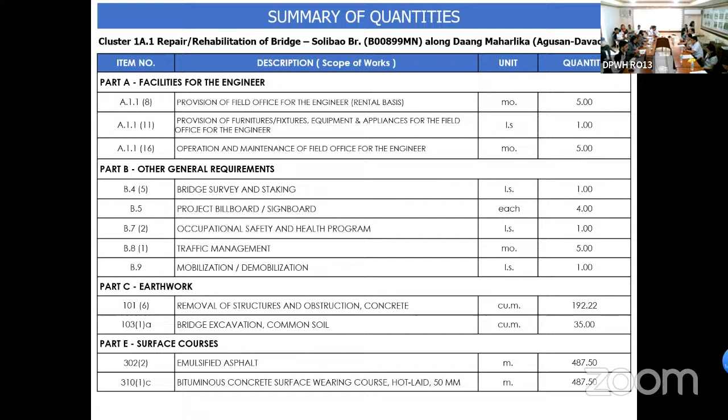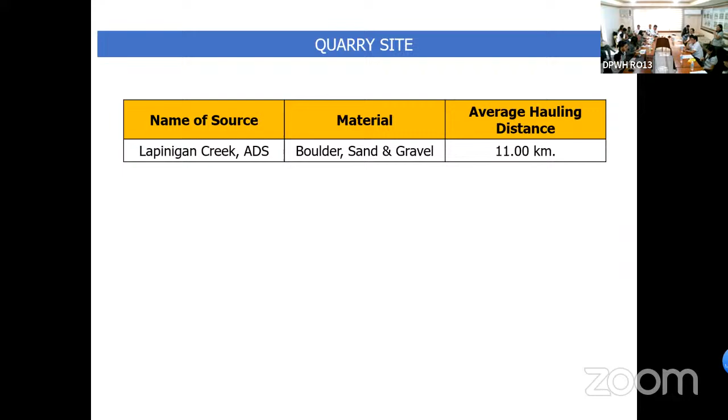Description of work to be done: facilities for the engineers, 0.66%; other general requirements, 2.55%; earthwork, 2.01%; surface courses, 1.42%; bridge construction, 93.36%, with a total of 100%. Scope of work: installation of restrainer, expansion joint, replacement of metal railing, application of asphalt. Summary of quantities for Part A, Part B, Part C, and Part E, and also for Part F, bridge construction. Quarry site: Lapinigan Creek, Agusan del Sur. Material: boulder, sand, and gravel. Average hauling distance, 11 kilometers.

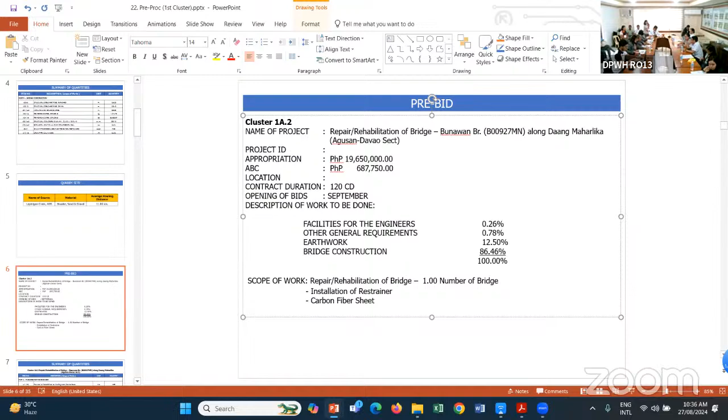Opening of bids. Total, sir -- it's per project. Oh, it's divided per bridge.

Description of work to be done: facilities for the engineers, 0.26%; other general requirements, 0.78%; earthwork, 12.50%; bridge construction, 86.46%, with a total of 100%. Scope of work: installation of restrainer and carbon fiber sheet. Summary of quantities for Bunawan Bridge, Part A, Part B, and Part F.

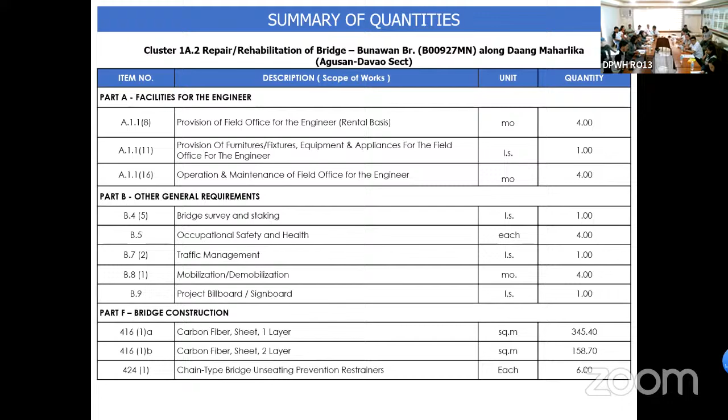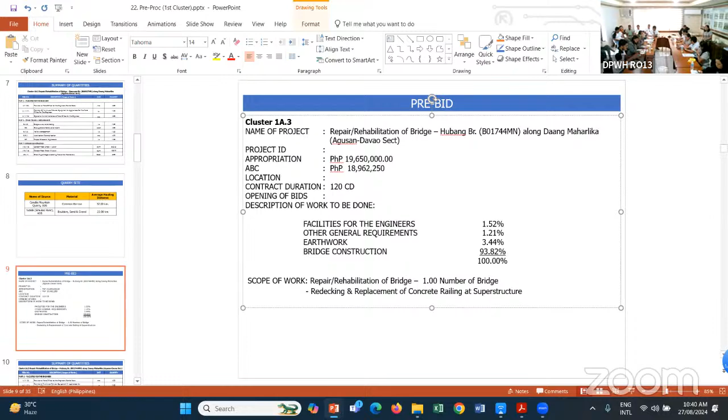For cluster 1A3, repair rehabilitation of bridge, Hubang Bridge, B01744 MN, along Daang Maharlika, Agusan, Davao section. Appropriation of 19,650,000 pesos. ABC, 18,962,000 pesos and 250 pesos. Contract duration, 120 calendar days.

Description of work to be done: facilities for the engineers, 1.52%. Other general requirements, 1.21%. Earthwork, 3.44%. Bridge construction, 93.82%, with a total of 100%.

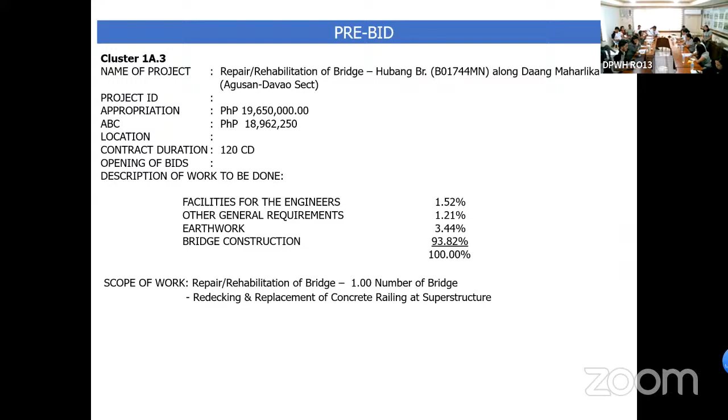Scope of work: redecking and replacement of concrete railing at superstructure. Summary of quantities for Part A, Part B, Part C, and Part F. Name of sources: Bangunay River, Agusan del Sur; Lapinigan Creek, Agusan del Sur. Materials: common borrow, boulder, sand, and gravel, with average hauling distance of 53 kilometers and 14 kilometers.

For cluster 1A4, repair rehabilitation of Bridge Bayugan Parallel Bridge 3, B01942 MN, along Daang Maharlika, Agusan, Davao section, with an appropriation of 19,050,000 pesos. ABC, 18,383,250 pesos. Contract duration of 150 calendar days.

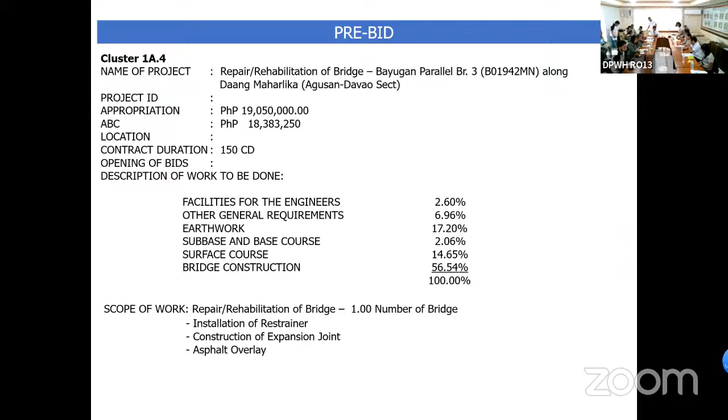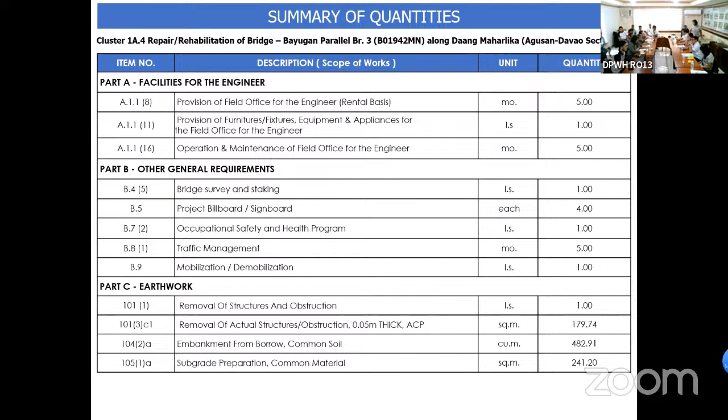Scope of work: installation of restrainer, construction of expansion joint, and asphalt overlay. For the summary of quantities: Part A, Part B, Part C, Part E, and Part F. For the quarry site sources: Candies Mountain Quarry, Agusan del Sur; Lapinigan Creek, Agusan del Sur. Materials: common borrow and aggregate sub-base course, boulder, sand, and gravel, with an average hauling distance of 53 kilometers and 20 kilometers.

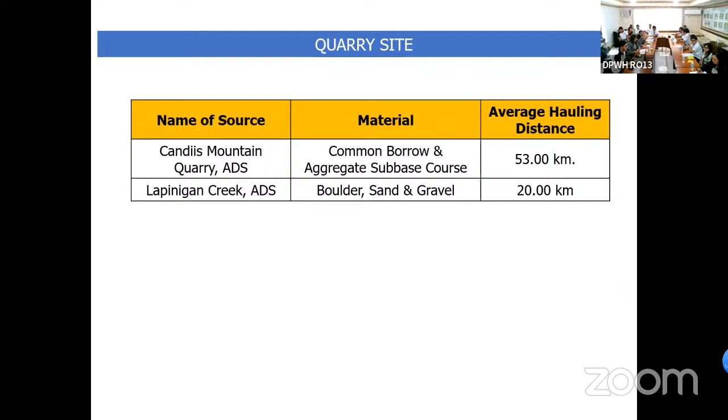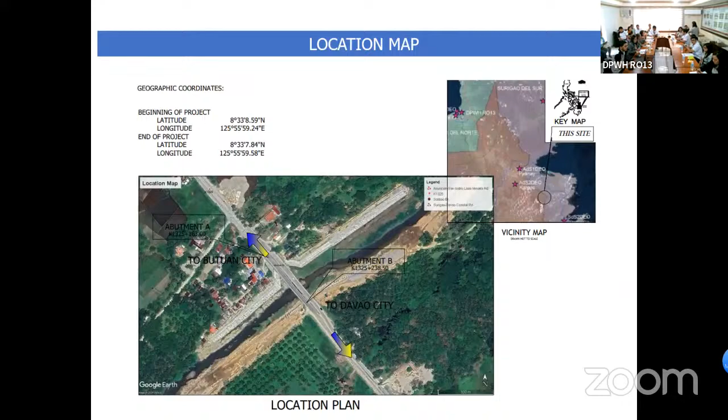For Sulibao Bridge: plans, location map, the general elevation. For the Bunawan Bridge: the location map, general plan and elevation. Carbon fiber plan.

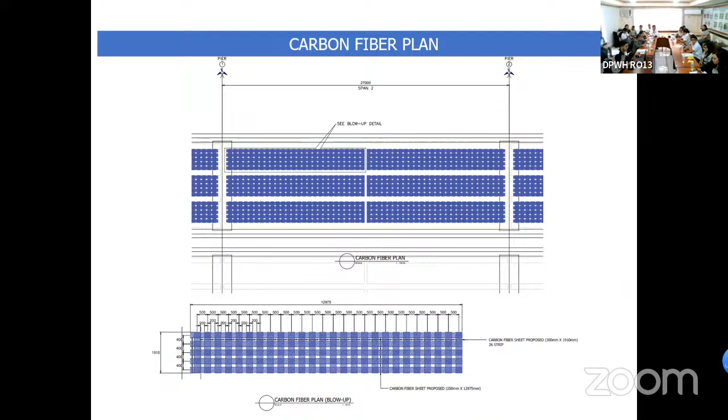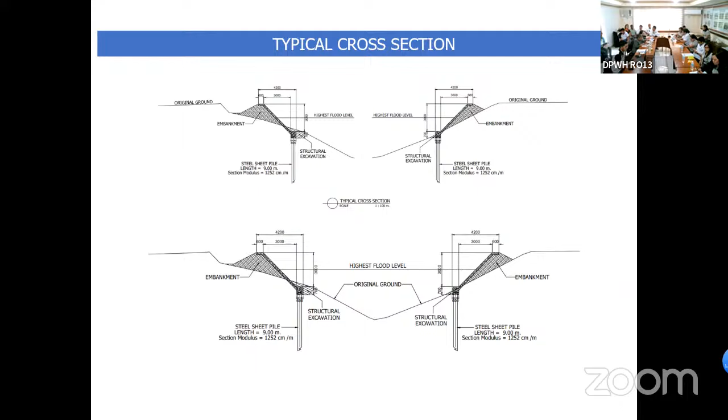For cluster 1A3, Ubang Bridge: location map, general plan and elevation, typical cross sections, concrete slope protection detail.

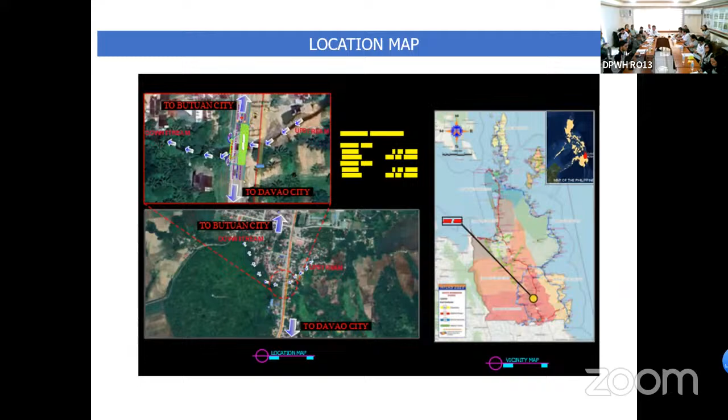For cluster 1A4, Bayugan Parallel Bridge 3: location map, general plan and elevation, typical sections. And that's all, ma'am, sir.

Yes, sir. So do we have any questions or clarifications? So I think there's none. So you may now proceed with the next project, sir.

Next, I will be presenting the cluster 1B with a contract ID of 23N000207, rehabilitation of disaster-related infrastructure and other facilities, repair rehabilitation of bridge, Mabuhay Bridge, and Banahaw Bridge.

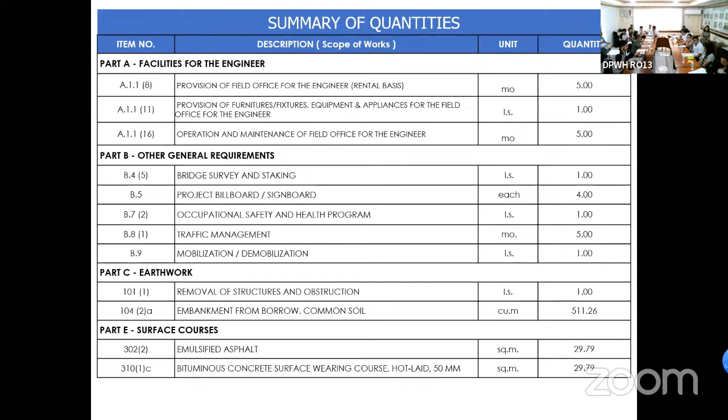Scope of work: construction of expansion joint, carbon fiber sheet at girder, reconstruction of abutment protection. Summary of quantities for Part A, Part B, Part C, Part E, and for Part F.

Quarry site, Anaoaon, Surigao del Norte, item 200, 300, and 505. Average hauling distance, 26 kilometers from project site. Bangunay River, item 104. Average hauling distance, 53 kilometers from project site.

For cluster 1B2, repair, rehabilitation of bridge, Banahaw Bridge, B01516 MN along Surigao City, San Juan Coastal Road, Surigao City, Surigao del Norte. Appropriation, 28,800,000 pesos. ABC, 27,792,000 pesos. Location, Surigao City, Surigao del Norte. Contract duration, 150 calendar days.

Description of work to be done: facilities for the engineer, 1%. Other general requirements, 1.41%. Earthworks, 54.45%. Bridge construction, 43.17%, with a total of 100%.

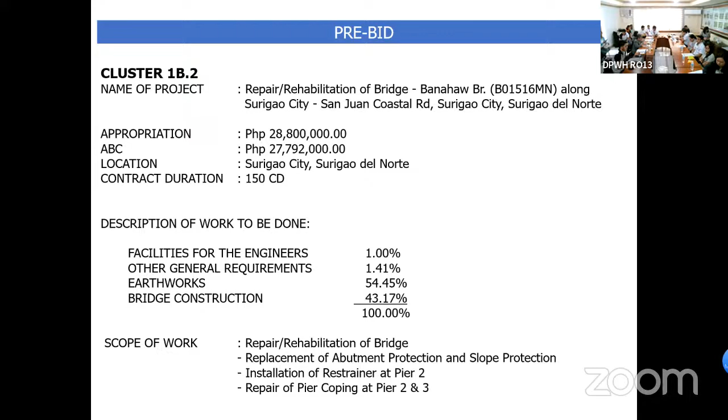Scope of work: replacement of abutment protection and slope protection, installation of restrainer at Pier 2, repair of pier coping at Pier 2 and 3. Summary of quantities for Part A, Part B, Part C, and Part F.

For the quarry site: Anaoaon, Surigao del Norte, items 200, 300, 505, and 311. Average hauling distance, 8 kilometers from project site. Bangunay River, item 104. Average hauling distance, 73 kilometers from project site.

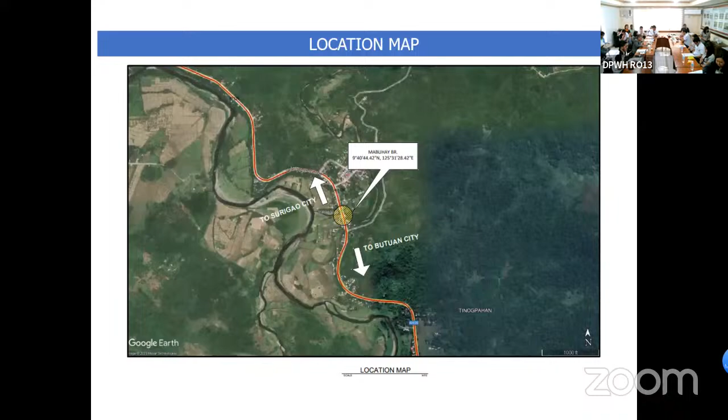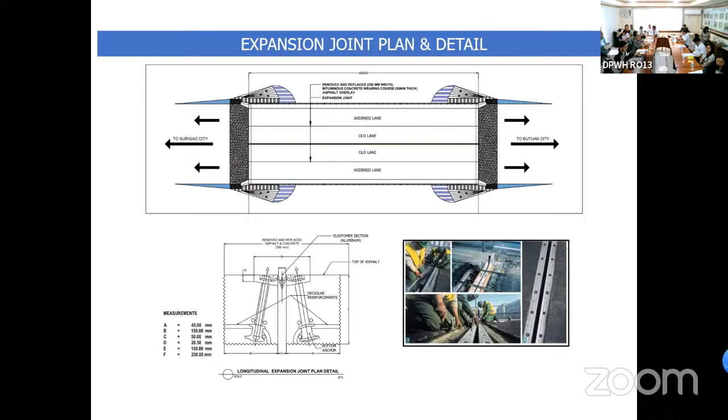For the plan for cluster 1B1, Mabuhay Bridge: location map, general plan and elevation, general plan at substructure, elevation plan at substructure, expansion joint detail, abutment protection detail.

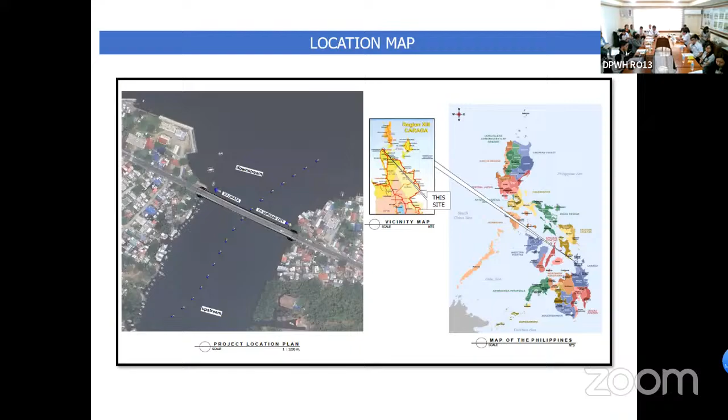For cluster 1B2, Banahaw Bridge: location map, general plan and elevation, restrainer detail, typical sections. And that's all, ma'am, sir.

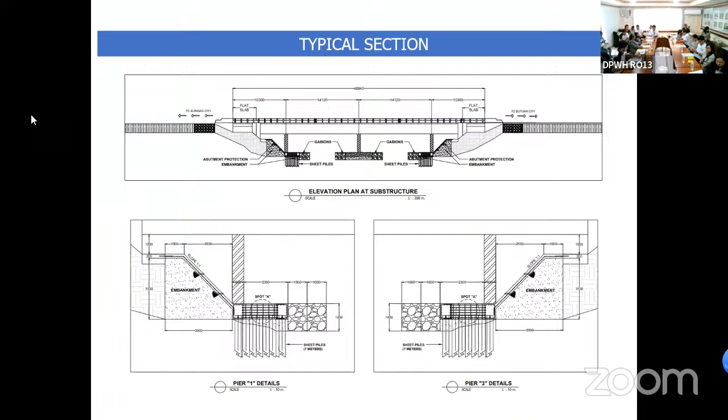Thank you, sir. So, do we have any questions or clarifications from the presented PowerPoint? So, none. You may now proceed to the next project.

For the next project, 23N00208, rehabilitation of disaster-related infrastructure and other facilities. Repair rehabilitation of bridge, Lipata Bridge, along Daang Maharlika, Lipata, Surigao section, Surigao del Norte.

With an appropriation of 19,200,000 pesos. ABC, 18,528,000 pesos. Location at Lipata, Surigao del Norte. Contract duration of 150 calendar days. Description of work to be done.

Facilities for the engineers, 1.41%. Other general requirements, 1.81%. Earthworks, 11.48%. Bridge construction, 85.30%, with a total of 100%.

Scope of work: repair and rehabilitation of damaged slope protection, installation of carbon fiber sheet at deck slab, repainting of structural steel I-girders, removal and replacement of lined canal.

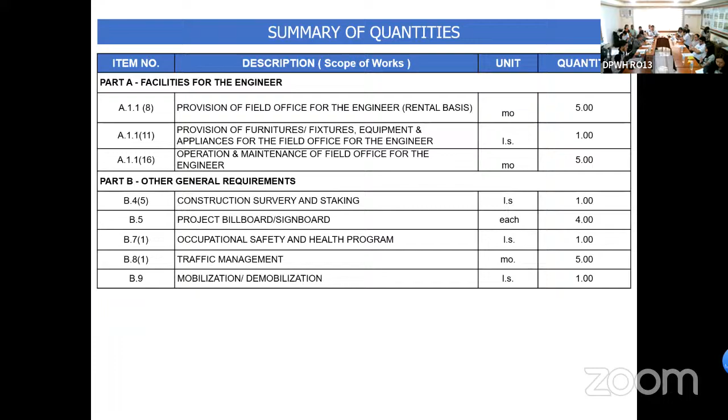For the summary of quantities, Part A, Part B, Part C, and Part F.

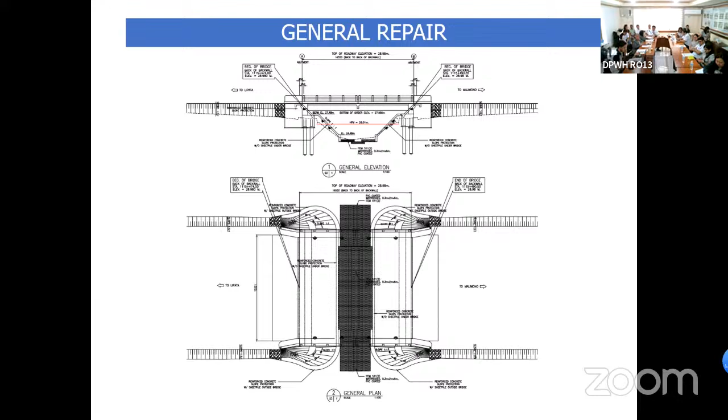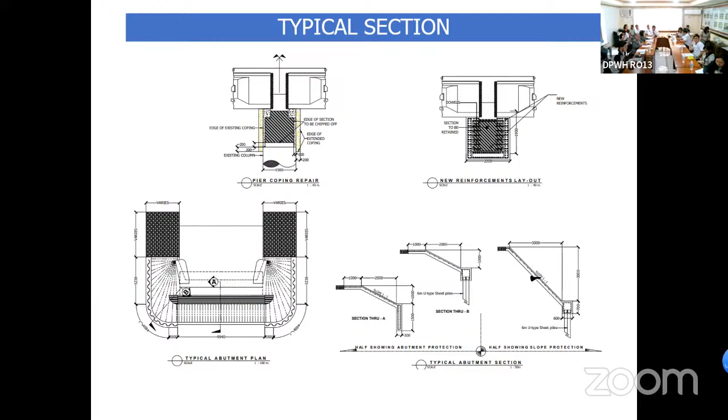Location map of the project. The general plan and elevation. Typical cross sections. Restrainer detail.

For quarry site, Anaw-Awon, Surigao del Norte, item 200, 300, 505, and 311. Average hauling distance, 26 kilometers from the project site. For item 104 at Bangunay River, average hauling distance, 35 kilometers from the project site.

And that's all, ma'am, sir.

Thank you, sir. Do we have questions or clarifications? So none. Proceed now to the next project.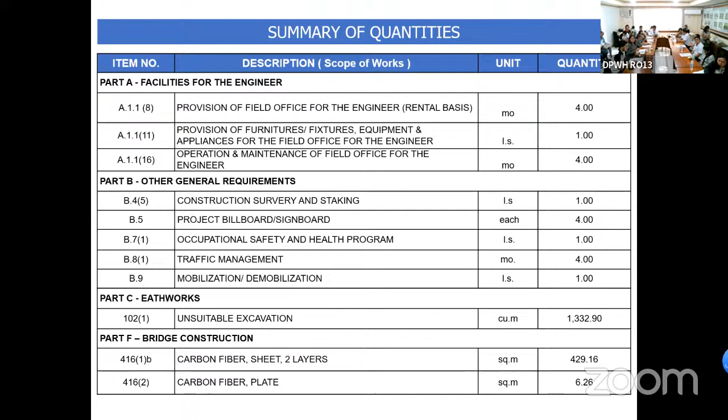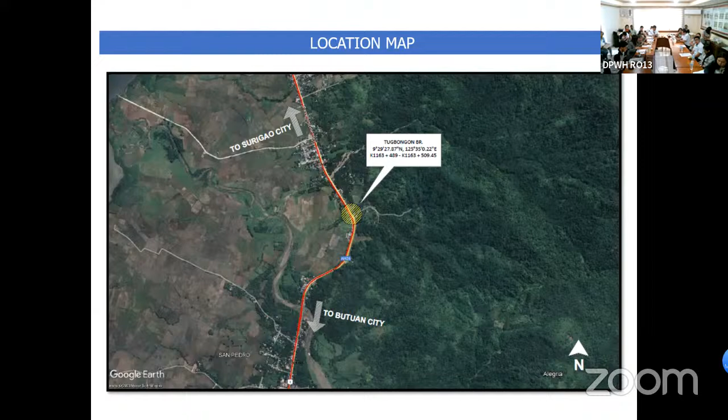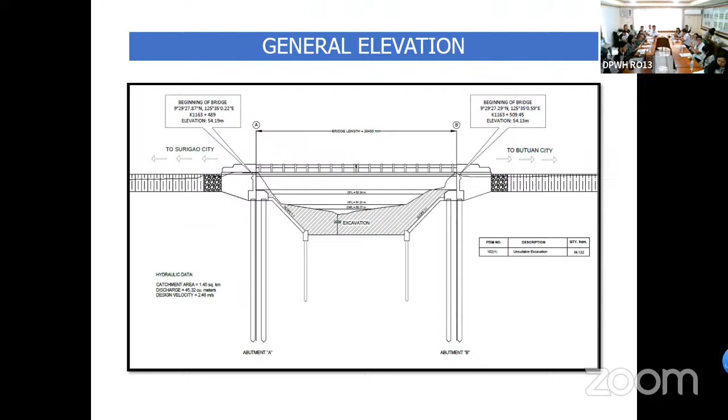Quarry site, Matin-ao, Surigao del Norte, for item 200, 300, 505, and 311, with an average hauling distance of 25 kilometers from the project site. For item 104 at Bangonay River, with an average hauling distance of 26 kilometers from project site.

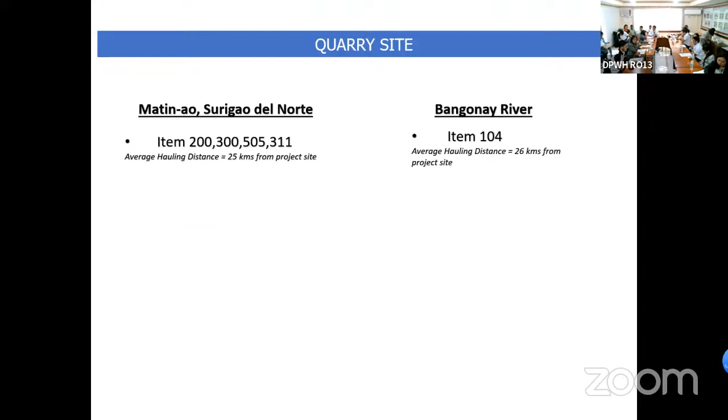That's all, ma'am and sir. Thank you, sir. So questions or clarifications from the presentation? So none. Proceed, sir, to the next one.

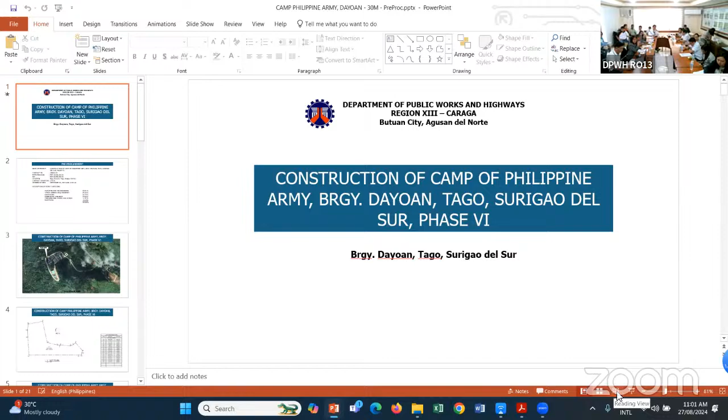Good morning once again. I'm going to present the project title Construction of Camp of Philippine Army, Barangay Dayoan, Tago, Surigao del Sur, Phase 6. Location, Barangay Dayoan, Tago, Surigao del Sur.

With contract ID 24N00183, appropriation 30 million with ABC of 28,950,000. Contract duration 270 calendar days. Opening of bids September 6, 2024, 10 a.m. onwards.

Description of work to be done. Facilities for the engineers, 0.51%. Other general requirements, 5.28%. Earthworks, 2.73%. Reinforced concrete, 20.63%. Finishing and other civil works, 11.57%. Electrical, 14.19%, with a total of 100%.

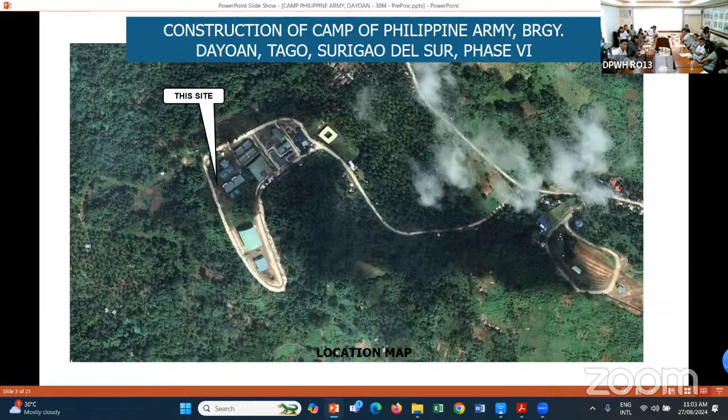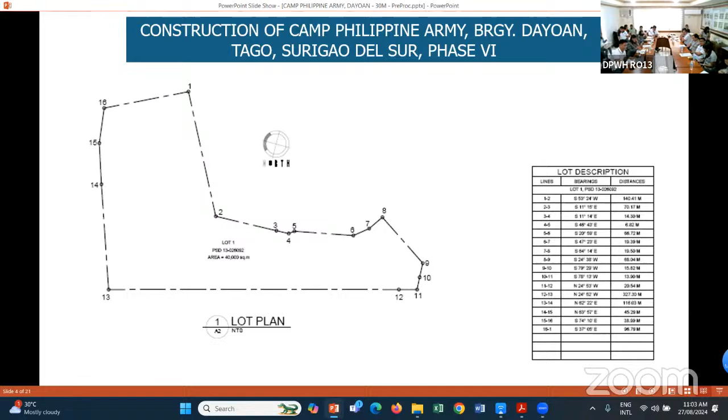Showing the location map of the camp at Barangay Tago. The lot plan and description. The site development plan of the camp.

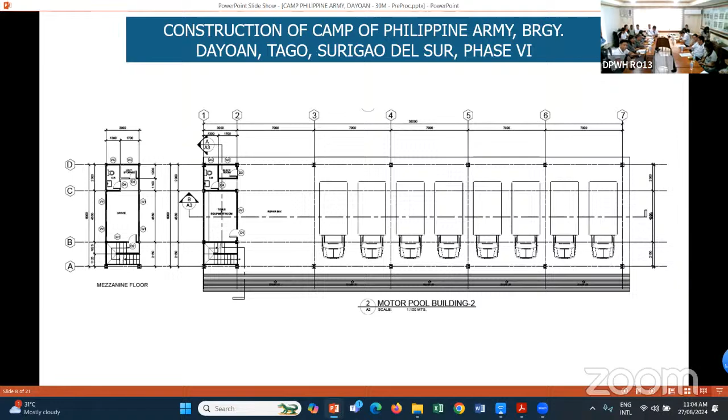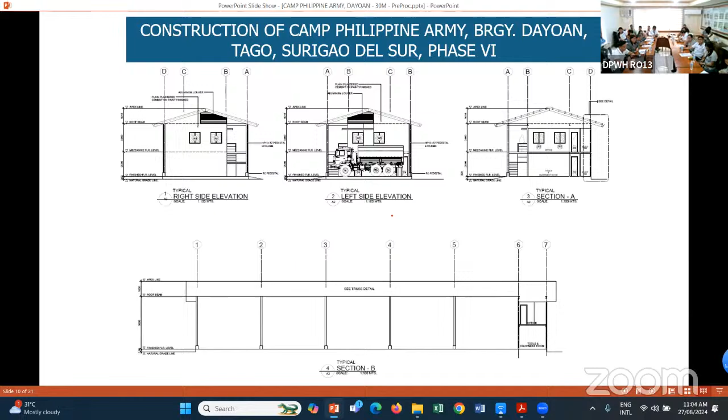The typical elevation. Typical elevation and section. The window wall detail of the motor pool, with the part on the mezzanine, and doors and window schedule.

Foundation plan, typical detail of tie beam, and column footing details.

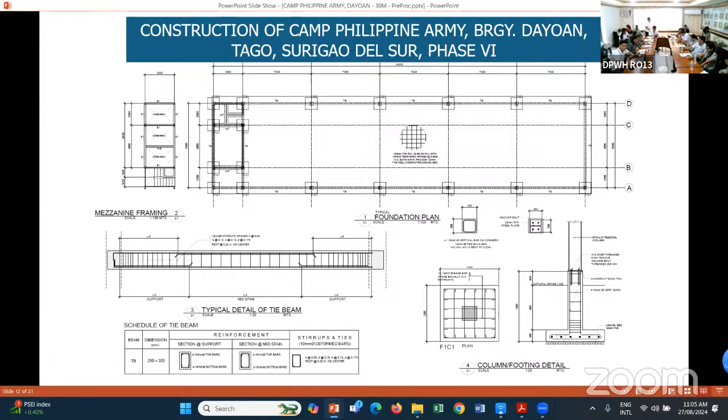The roof framing plan and rafter details and the blow up details.

The pump house plan and also the detail of the pump house.

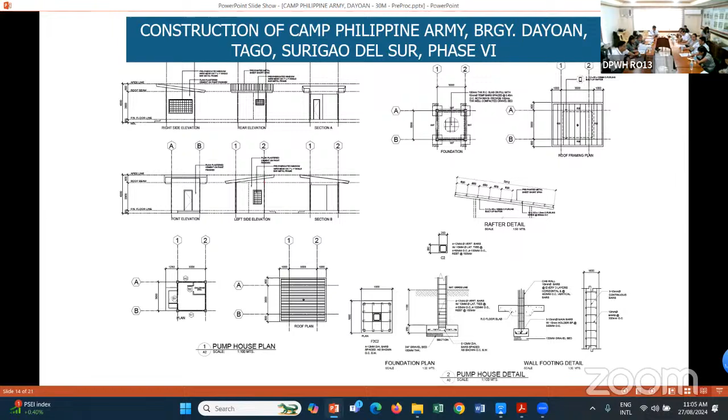The typical trench detail and its description. Submersible detail.

Showing the section plan of pump house and layout of the water system. The traverse of the site, which the pipe going to existing water tank above.

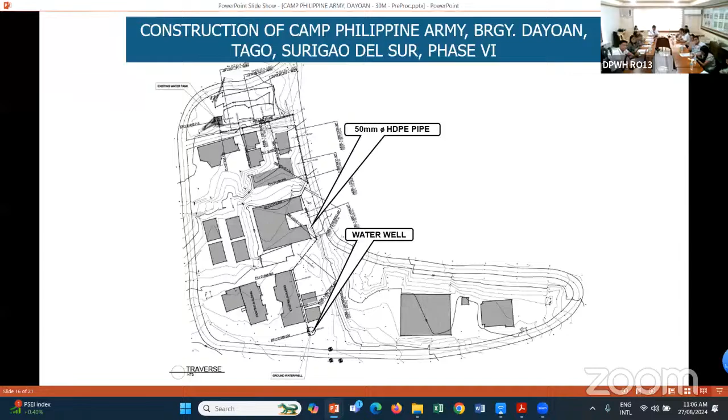The profile of the soil. Medyo habog-habog siya.

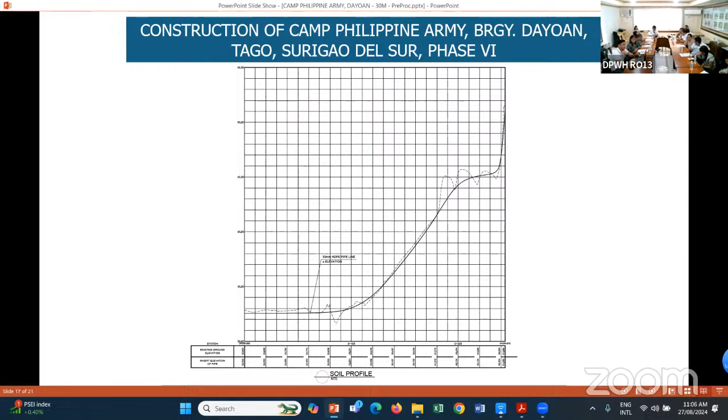Summary of quantities. Dili sa tambakan. Bali musaka gid siya. Ang pipe musaka gid siya.

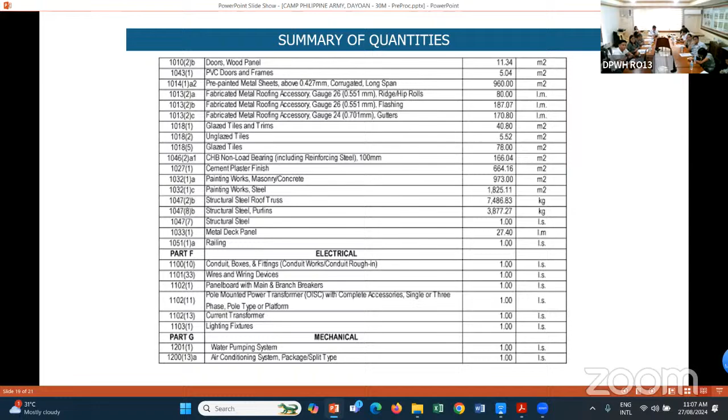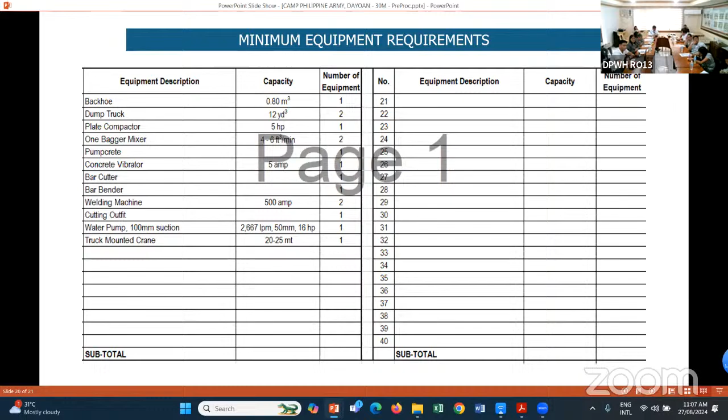The minimum equipment requirements. That's all.

Thank you, sir. Do we have questions or clarifications? So none, you may now proceed to the next project. Okay, thank you.

Project title, DOH Health Facilities Enhancement Program (HFEP), Cagwait Super Health Center. Location, Purok Talisay B, Barangay Aras-asan, Cagwait, Surigao del Sur.

With a contract ID 24N00191, ABC of 11,650,000 with a duration of 240 calendar days and the opening of bids which is September 10, 2024, 10 a.m. onwards.

Description of work to be done. Facilities for engineers, 2.24%. Other general requirements, 2.55%. Earthworks, 5.48%. Reinforced concrete, 25.63%. Finishing and other civil works, 57.74%. Electrical, 4.25%. Mechanical, 2.11%, with a total of 100%.

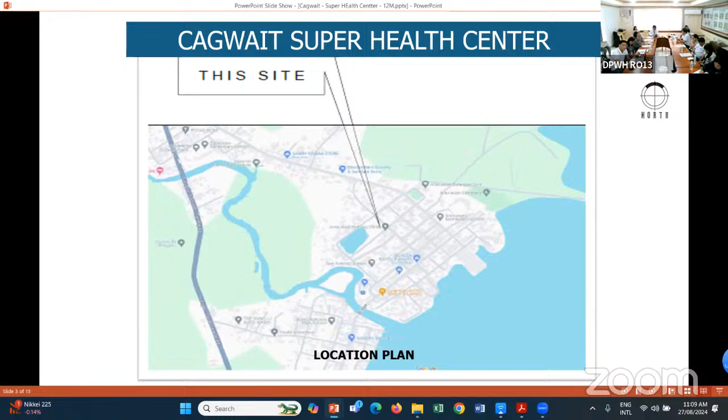The location map of the project site at Barangay Cagwait. The perspective.

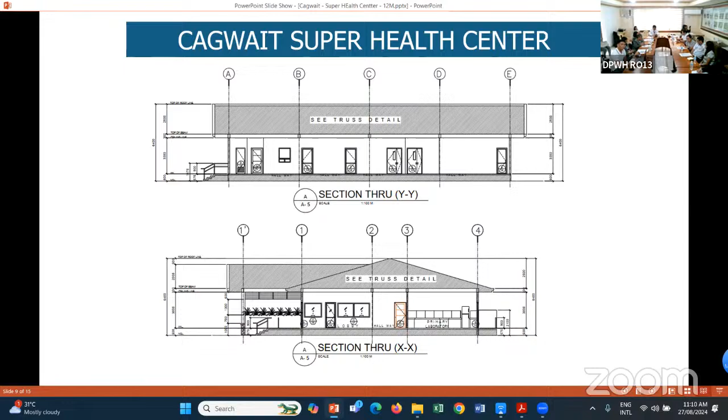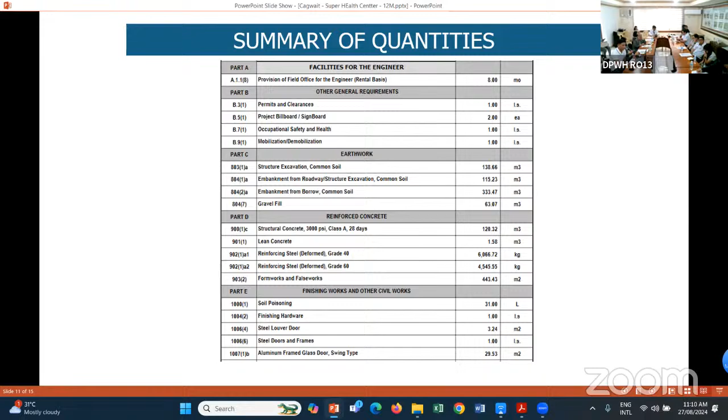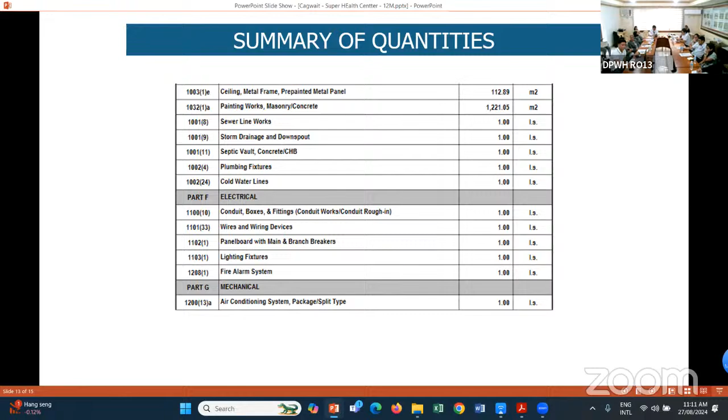Summary of quantities. Continue summary of quantities. And the minimum requirements of equipment.

And that's all. Thank you, sir. So, any questions or clarifications? So, none. We now proceed.

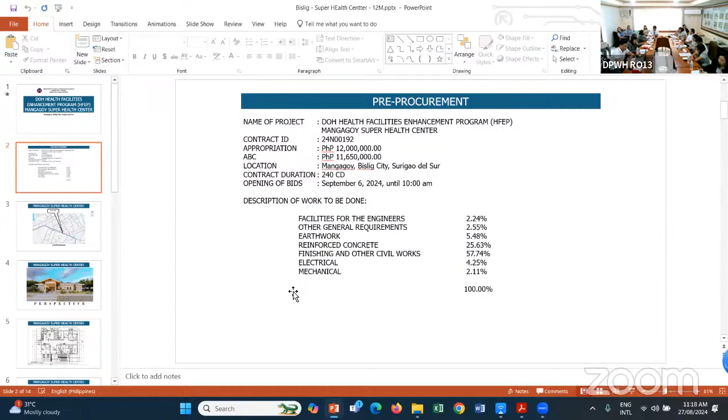Description of work to be done: Facilities for the engineers 2.24%, other general requirements 2.55%, earthwork 5.48%, reinforced concrete 25.63%, finishing and other civil works 57.74%, electrical 4.25%, mechanical 2.11%, total 100%.

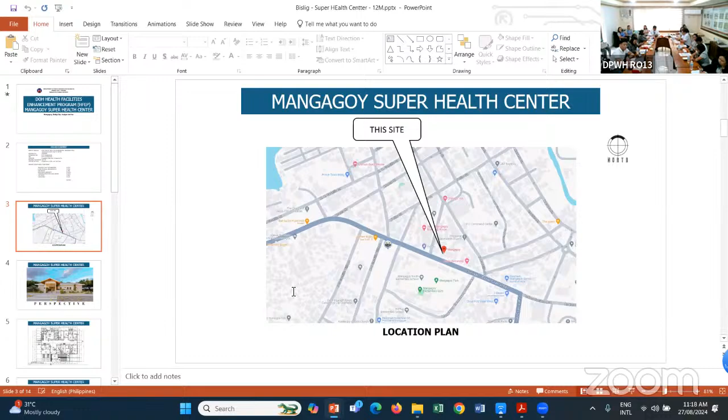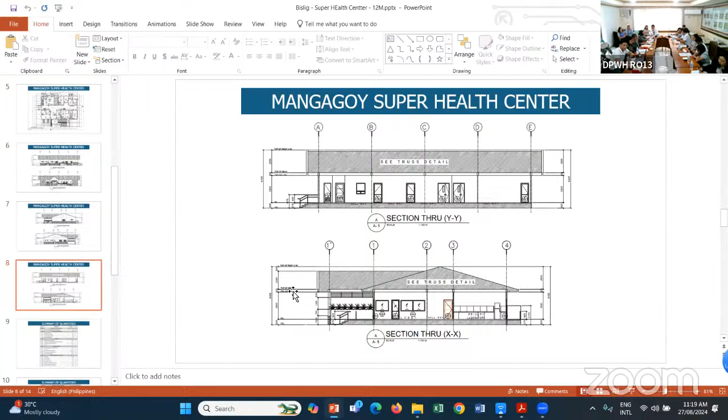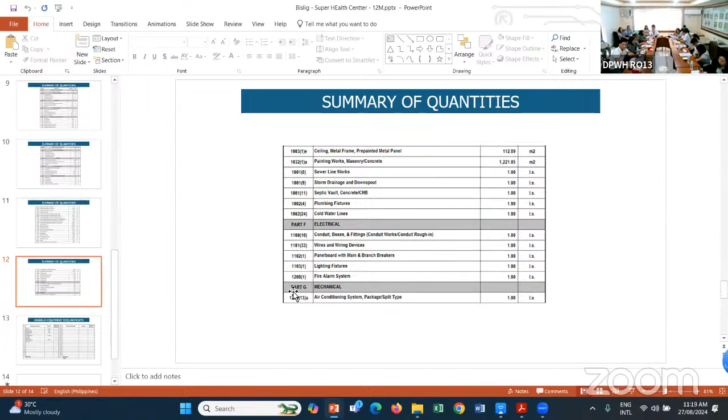Location map of the project site in Bislig City, the standard perspective, standard floor plan of the Super Health Center, the elevations, the sections, summary of quantities, and the minimum equipment requirements, same as the previous presentation. That's all, thank you.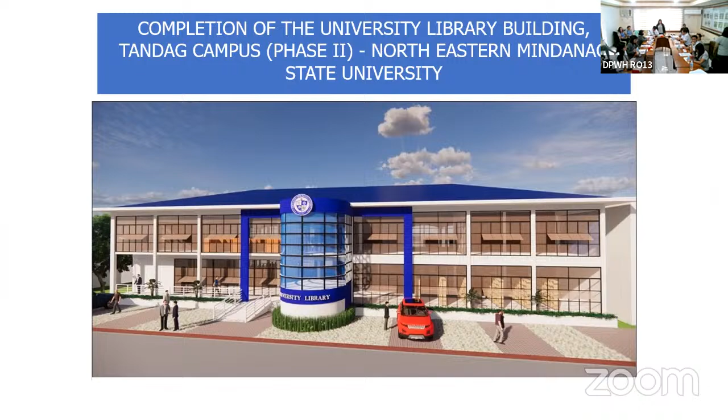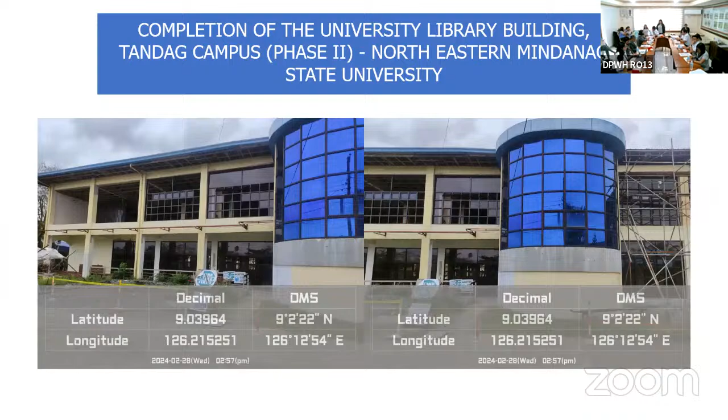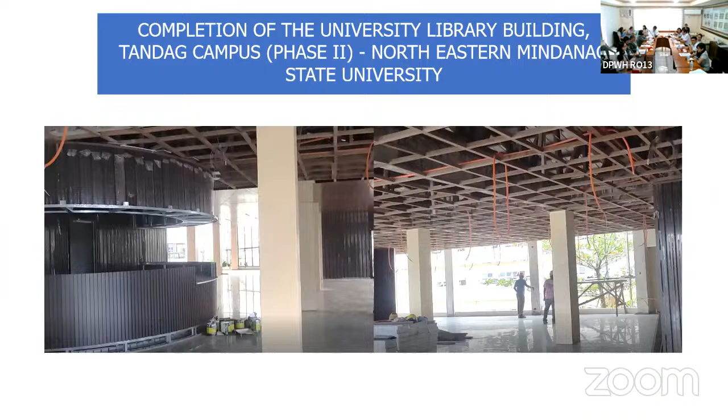This is the perspective of the library and the existing structure in Tandag campus, including the interior existing. Mainly interior finishes and renovations plus other small additional rooms, for the second floor of the library existing, vicinity map and site development plan.

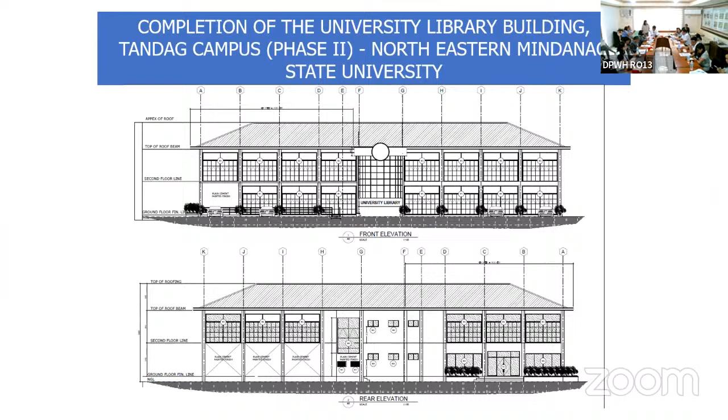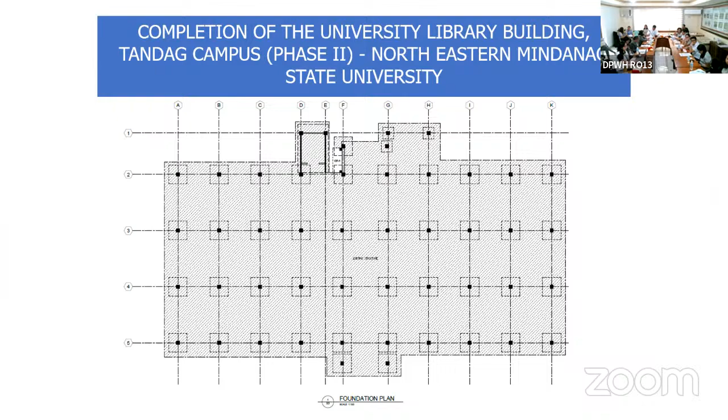Ground floor plan, second floor plan, front elevation and rear elevation of the project, right side elevation and left side elevation, second floor reflected ceiling plan, foundation plan with the additional PWD toilet for each floor, second floor framing plan, roof beam framing plan, and the powerhouse foundation plan and structural detail.

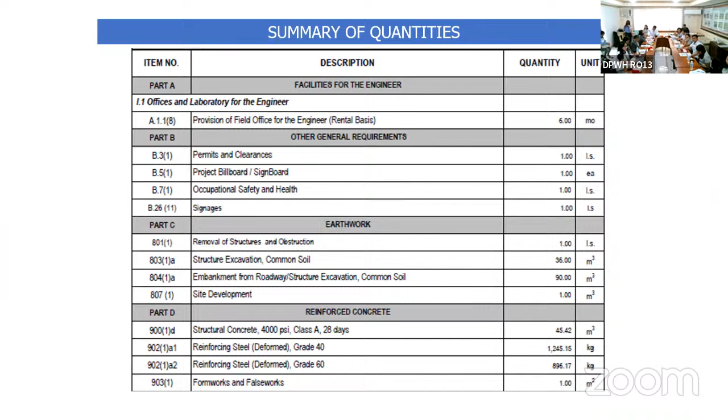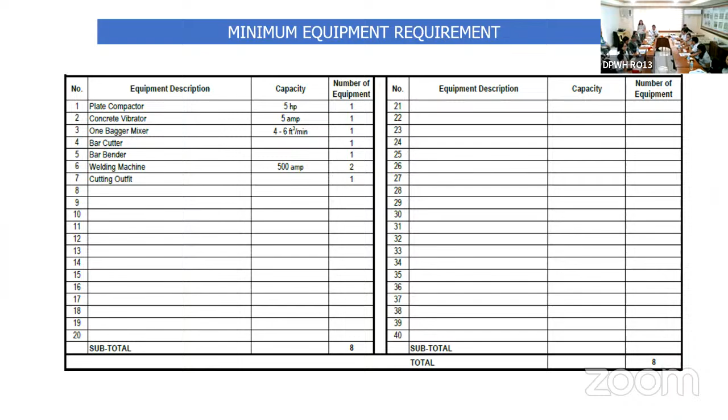Summary of quantities for Part A, Part B, Part C, Part D, Part E, Part F, Part G, Part H, and the minimum equipment requirement. That's all, thank you.

Thank you, Ma'am. Do you have any questions or clarifications from the presentation? There is none. You may now proceed to the last project.

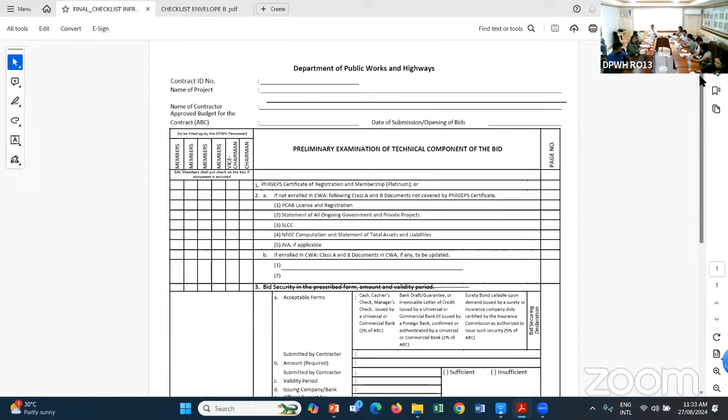Letter B, if enrolled in CWA, Class A and B documents in CWA, if any, to be updated. For the bid security in the prescribed form, amount and validity period, here are the acceptable forms.

It can be a cashier's check or manager's check issued by a universal or commercial bank at 2% of ABC. Another option is a bank draft, guarantee, or irrevocable letter of credit issued by a universal or commercial bank - if issued by a foreign bank, confirmed or authenticated by a universal or commercial bank at 2% of ABC. Another one is a surety bond callable upon demand, issued by a surety or insurance company duly certified by the Insurance Commission as authorized to issue such security, at 5% of ABC.

And lastly, the most common one, a bid securing declaration.

Fourth requirement is the project requirement, which shall include the following: Letter A, organizational chart for the contract to be bid. B, list of contractor's key personnel per Clause 14.2A3B of the BDS, to be assigned to the contract with their complete qualification data. Letter C, list of contractor's major construction and laboratory equipment units owned, leased, and/or under purchase agreements, supported by proof of ownership, lease purchase, and certification of availability of equipment from lessor/vendor for the project duration, per Clause 14.2A3C of the BDS.

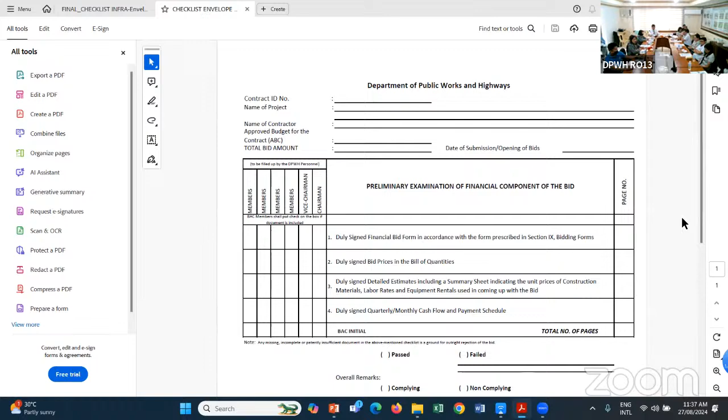Fourth, it should be a duly signed quarterly and monthly cash flow and payments schedule. Again, please take note that any missing, incomplete, or patently insufficient document in the above-mentioned checklist is a ground for outright rejection of the bid. That's all for the technical and financial requirements during the bidding conference.

Thank you, Ma'am Sarah. So, do we have any questions or clarifications regarding the technical and financial requirements? There is none.